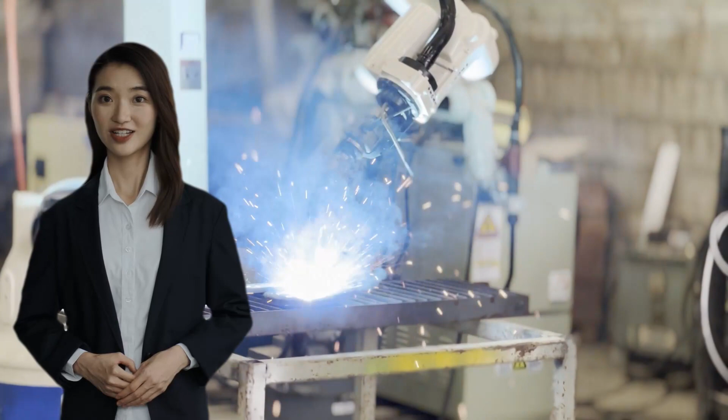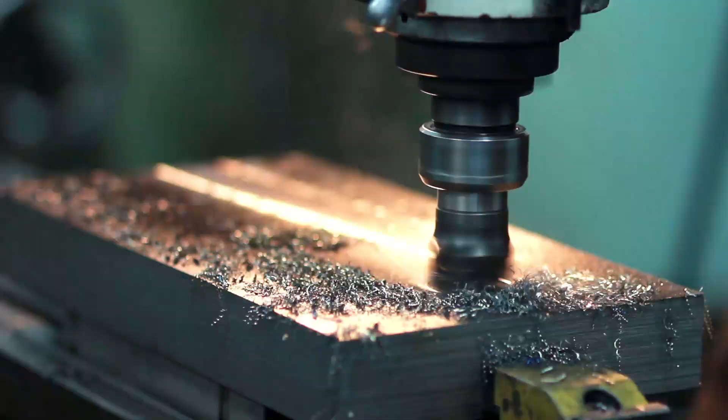In today's episode, we're delving deep into the world of precision machining and digital technology, and exploring how China is overcoming challenges in the assembly of CNC machine tools. This comprehensive journey will take us through the history, innovation, and future of CNC machine tools in China. So buckle up, grab a snack, and let's embark on this exciting and informative adventure together.

Machine tools, often referred to as the mother of all industries, play a pivotal role in the manufacturing process. Their history dates back to the Industrial Revolution when they were first developed to shape metal and other rigid materials. Today, machine tools have evolved into advanced computer numerical control (CNC) machines that can create complex parts with extreme precision.

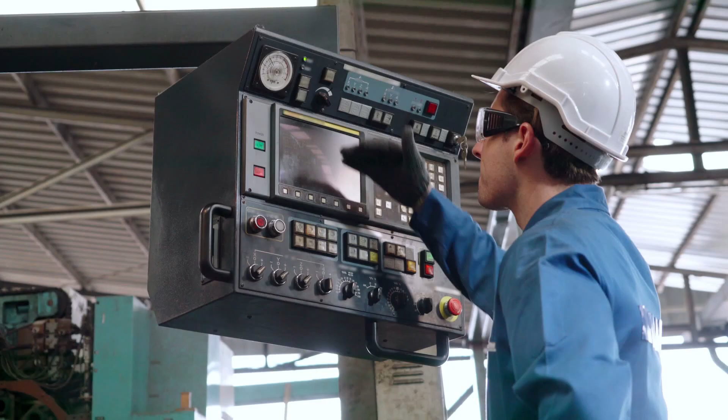Shenyang Machine Tool Co., Limited, known as the cradle of China's machine tools, is at the forefront of upgrading and iterating a new generation of CNC machine tools, paving the way for digital advancements in the sector.

Zhang, a post-85's designer at Shenyang Machine Tool, has been involved in the research and development of numerous CNC machine tools with original Chinese technology. He ardently believes in the power of hard work and persistence, asserting that there are no shortcuts to success.

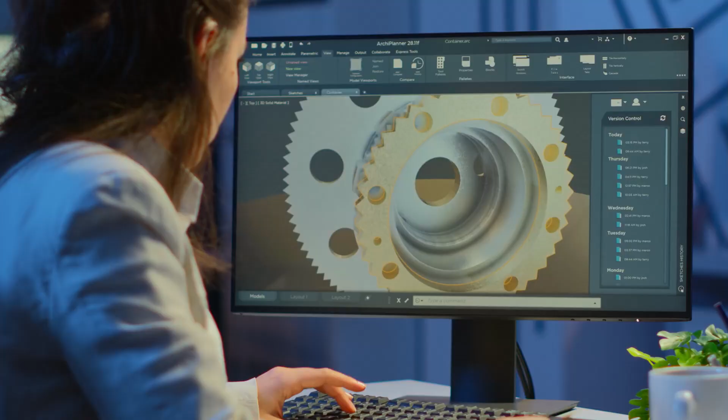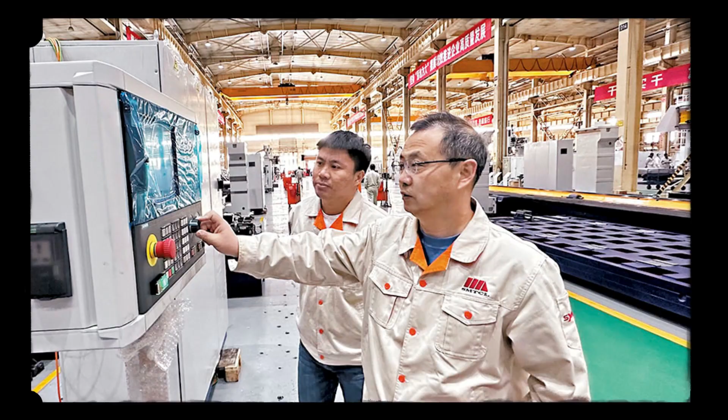Over the years, Shenyang Machine Tool has made significant contributions to China's equipment manufacturing industry, with a plethora of breakthroughs in high-speed rail, energy, and power sectors. After undergoing a strategic reorganization in 2019, the company achieved a loss-free turnaround in 2022. This period saw the birth of a multitude of high-end CNC machine tool technologies.

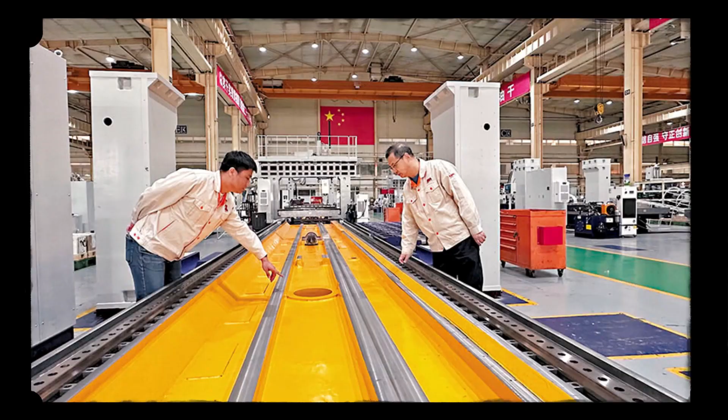Zhang and his master, Haoming, have been key participants in these groundbreaking technological advancements. Together, they have pushed the boundaries of what is possible with CNC machine tools and contributed to China's growing reputation as a global leader in manufacturing technology.

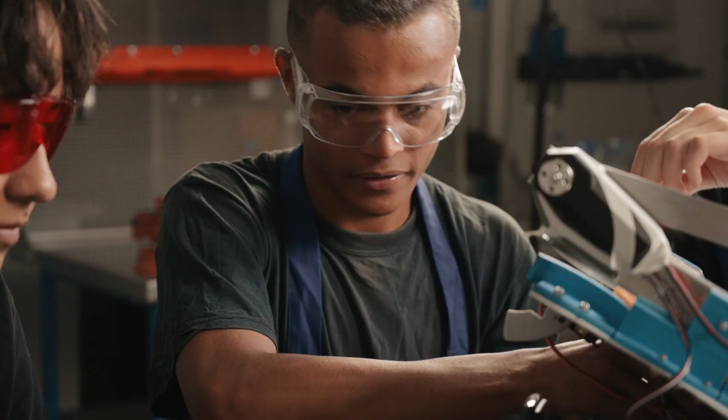In 2019, Zhang and Haoming faced a daunting challenge: designing a machine tool for the localization of high-speed rail parts. With a tight deadline of just 1.5 months, they were tasked with completing the design of the Longmen Mobile 5-axis linkage processing center, a brand new equipment with enormous specifications.

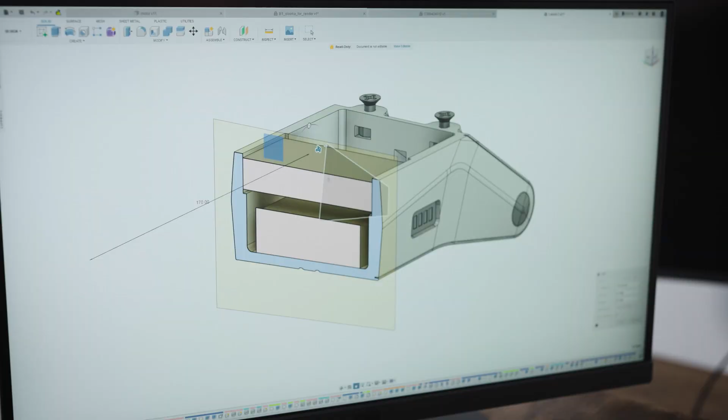The duo encountered numerous obstacles, such as the risk of deformation during the machining process. However, they harnessed digital technology to develop deformation compensation processing technology, which enabled them to overcome these challenges.

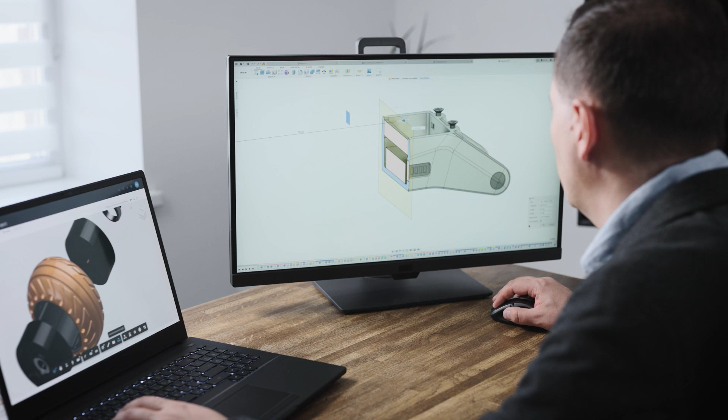But their journey didn't end there. During the assembly process, they grappled with difficulties stemming from the ultra-long bed of the machine tool. Zhang and his master had to ensure the straightness of the machine tool, which would ultimately determine the manufacturing quality of China's high-speed rail.

Through sheer determination and relentless hard work, they triumphed over these difficulties and achieved the required straightness indicators.

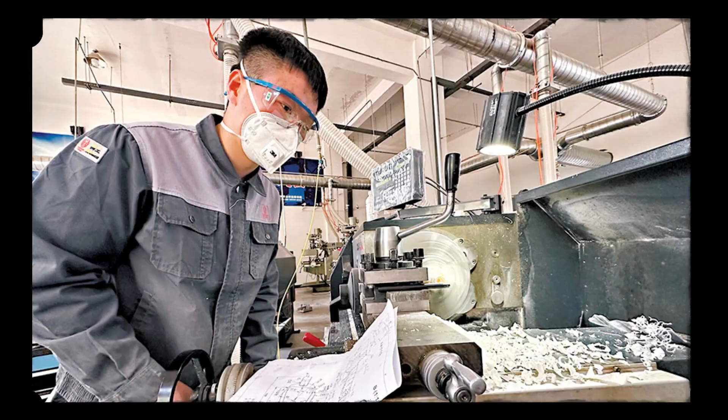Zhang is acutely aware of the pressing need for talent across all facets of manufacturing, and the development of machine tool intelligence is no exception.

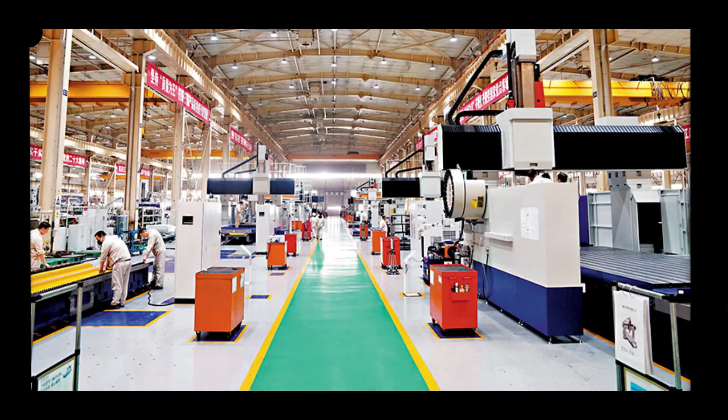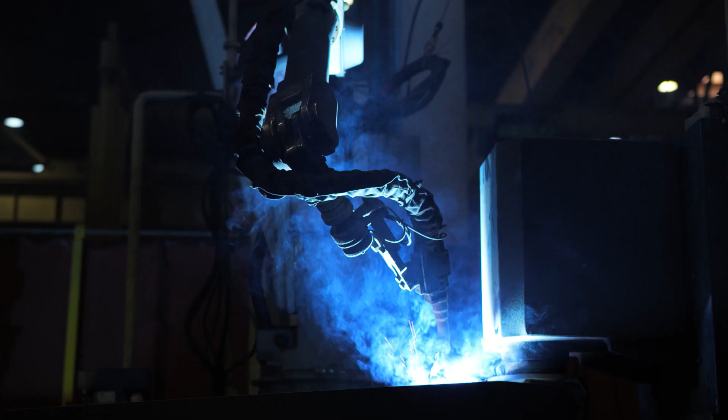After enrolling in a joint doctoral program between China General Technology Group and Shanghai Jiaotong University, he gained a more profound understanding of the demand for talent in research, development, and production sectors. This experience reinforced the importance of continuous learning and collaboration between industry and academia to drive innovation.

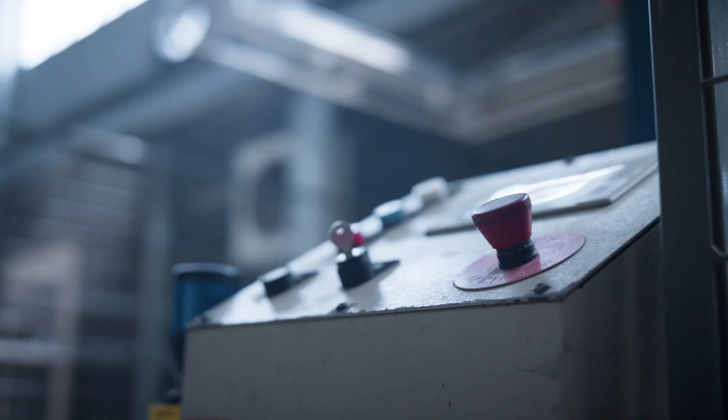Liaoning, dubbed the first industrial base in New China, boasts a rich history of industrial achievements. While its old industrial base has undergone significant transformations, the spirit of industrial workers remains unshakable.

Thanks to policy support, vocational education, competition platforms, and a positive social atmosphere, new talents continue to be nurtured in the region. Liaoning's steadfast focus on promoting the craftsman spirit and building the Liaoning Craftsman brand is reaping rewards, with an ambitious goal of cultivating 1,000 leading high-skilled talents by 2025.

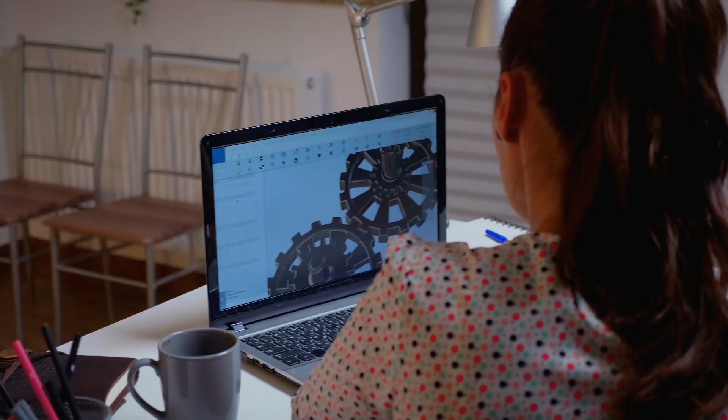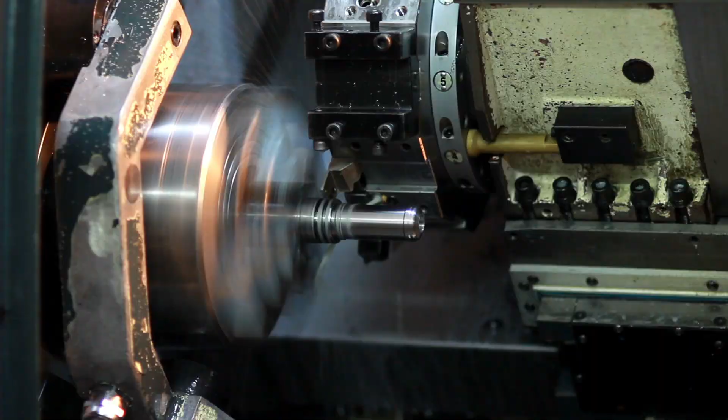Companies like Shenyang Machine Tool are investing heavily in talent training, providing ample opportunities for their employees to grow, develop, and excel. This commitment to the craftsman spirit is essential for maintaining China's position as a global leader in manufacturing technology and ensuring a bright future for the industry.

In conclusion, the spirit of craftsmanship is alive and well in China's manufacturing industry. Young technical workers are rising to the occasion and carrying on the legacy of industrial contributions. With a commitment to innovation, education, and the craftsman spirit, the future of CNC machine tools in China looks brighter than ever. Thanks for exploring China with us.